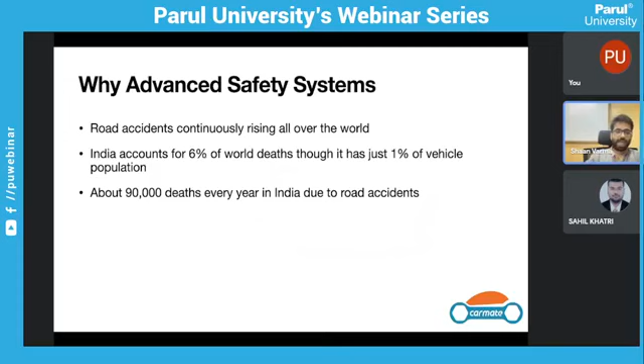So for that, there are two kinds of safety systems: one is active safety system and one is passive safety system. Now if we see the stages of accident, how we can do that: first is safe driving, wherein we follow all the safety protocols when we are driving, following each and everything in terms of safety. Second is accident avoidance, like we should avoid situations such as overspeeding and drunk driving. We should be driving in the proper lane at proper speed limits. Many things are there by which we can avoid the accident.

And then collision prediction. Now collision prediction is one thing, like humanly what we say, suppose we are driving and a car comes in front of us. For instance, one car is there, and if we have seen it, we try to brake the vehicle. But when we are not able to brake it, what happens? The accident is going to happen. So that is collision prediction from the driver's end. But now with active safety systems, there are many systems in place in which the vehicle detects that an accident is going to happen and takes corrective action to avoid the accident.

Similarly, these are three parts of active safety: safe driving, accident avoidance, and collision prediction. Now, if we talk about once the accident has happened, what do we need to do? Occupant protection, pedestrian protection, and occupant rescue. These three things come after the accident, which is called passive safety.

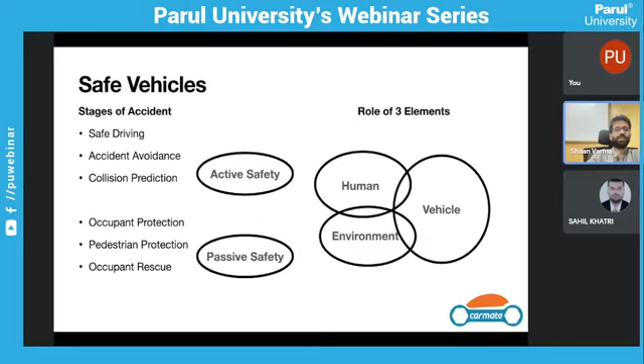Now, if we come to the definition: it is a scientific domain related to the study of design, construction, regulation of technology to minimize the occurrence and consequences of road traffic accidents. So these three factors combine into automobile safety.

Active safety systems help prevent accidents. They control the dynamics of the vehicle. Passive safety systems help mitigate the consequences of accidents. They protect occupants and pedestrians.

As an example, if you can see in the graph, active safety is hazard prevention. So hazard prevention includes hazard detection, hazard avoidance, and then hazard mitigation, so that the crash doesn't happen. For example, we are driving on a road, there is a car ahead of us, and the car suddenly brakes.

Now what we do is we try to maneuver or brake. If the distance is safe enough, we can brake the vehicle and avoid the collision. So the first part is hazard detection. Hazard detection is the first moment when we see that the car in front of us has braked. Now avoidance is either we brake the vehicle or we maneuver it to the other lane.

Now, if you are driving at excessively high speed and you brake the vehicle, it will lead to slippage of tires, which in turn will cause you to lose directional stability and you will collide in front of you. Now there is a system called anti-lock braking system, very well known, everybody might have heard about it. What it does is prevent your tire from locking. So if the tire is not locking, you will be able to easily steer the vehicle and avoid the collision. That is called hazard mitigation.

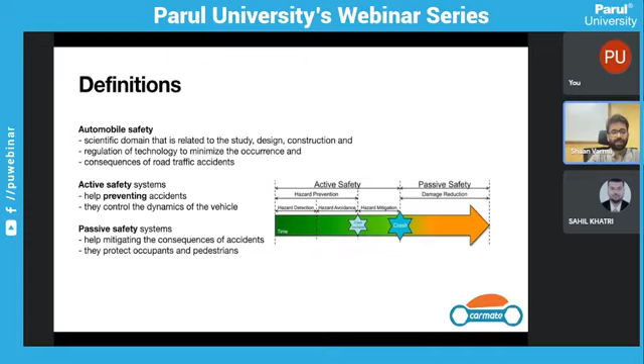Now we come to examples of active safety systems. One is the anti-lock braking system, which is the most common right now. We are also talking about traction control system and stability control system.

Anti-lock braking system, I have already explained. Traction control system is when you are driving at a speed of 80, 90, or 100, and you are taking a turn, your vehicle tires tend to slip, which leads to loss of control on your vehicle. In that case, you cannot do anything manually. So there is a gyro sensor inside your vehicle which will detect that the vehicle is going out of control and one of the wheels is slipping. It will tell the system that brake needs to be applied to regain control.

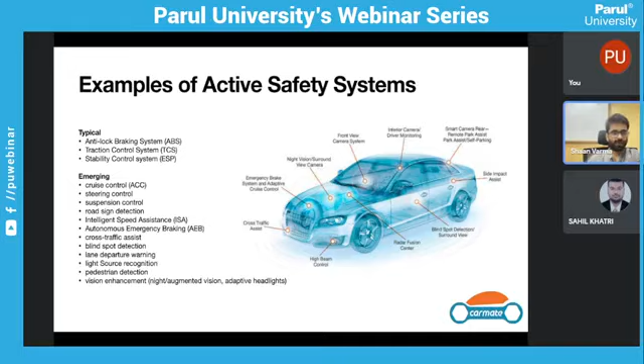We will have a look at a video of ABS and traction control system so you can understand it in a better way. I'll just play that video for you.

While the voice is coming for the video... No sir, voice is not there. Sir, just present your screen again as a tab. Just a minute, just a minute. Now again you present your screen, not entire screen, just a tab sir. Three options are there, I am not getting that option over here. Wait sir, just a minute. Sir, do one thing, just send me the link of that particular video in the chat box so I can share the tab. It will be done now. Just it's almost done, it will take a second.

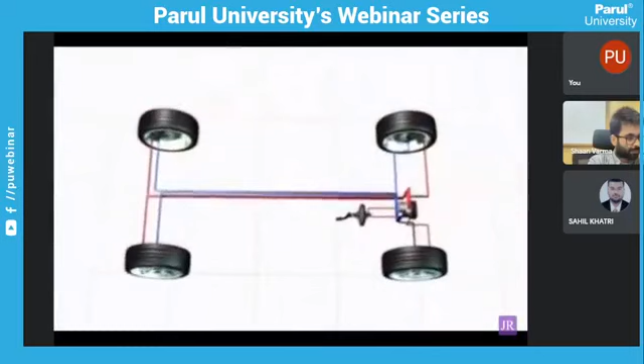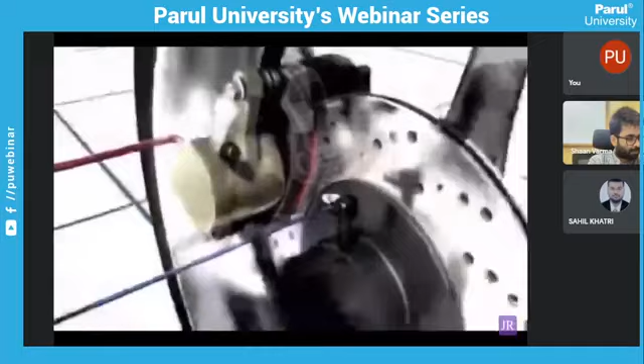ABS, the anti-lock braking system from Bosch, prevents locking of the wheels. ABS ensures that the vehicle remains steerable and stable while fully applying the brakes. The ABS control unit continuously monitors all wheels by means of wheel speed sensors. Should the system recognize that a wheel is locked, ABS immediately intervenes and systematically regulates braking pressure. ABS can regulate each individual wheel within milliseconds. With this electronic anti-lock braking system, a sort of electronic intermittent braking, ABS achieves stability and steerability with the shortest possible braking distance. Let's have a look at the ABS benefits in practice.

Full braking at 100 kilometers per hour. With ABS, the braking distance is significantly shorter and the vehicle remains stable.

Full braking in a curve. Without ABS, should the wheels lock while applying full brakes along a curve, the vehicle can no longer be steered and slips out of the curve. With ABS, you have the vehicle under control and you can steer systematically.

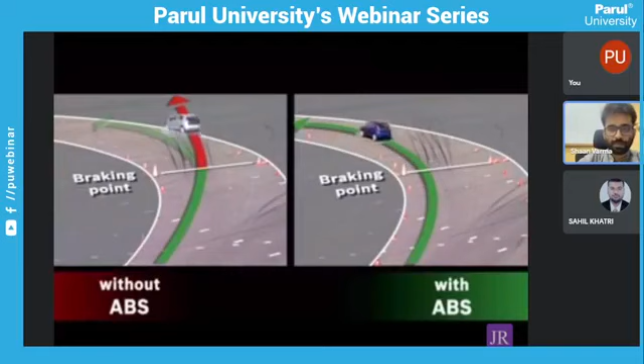Full braking and swerving. Should the braking distance not suffice, the driver must swerve to evade the obstacle. Without ABS, the vehicle cannot respond to the driver's steering attempts. With ABS, your vehicle remains steerable and stable. A collision is thus avoidable.

Full braking on different surfaces. Traction on lanes may vary due to volatile weather, dirt, and foliage. When fully applying brakes without ABS, the vehicle can quickly become unstable. With ABS, the vehicle remains stable even in this situation, with an optimal braking distance.

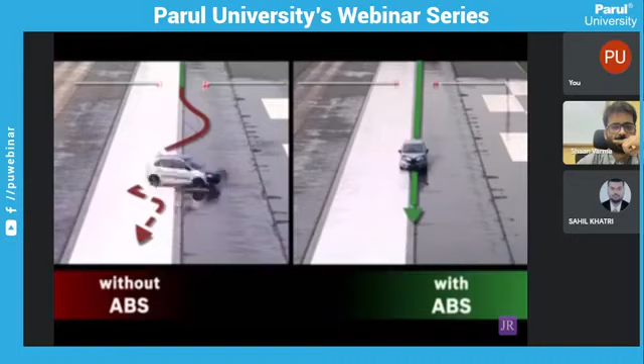In everyday life, these abilities of ABS.

So as you can see over here, we just saw how ABS can be fruitful and how it can prevent collision, and you can have control of your vehicle with that. Similarly, we will have a look at the video of electronic stability control and how it can prevent accidents.

As you drive, many forces act upon your vehicle. You probably feel some of them in everyday driving, like when you lean toward the side in a corner. When you turn the steering wheel, your car doesn't just move to one side, it actually rotates about a vertical axis. Under some conditions, the car might rotate too much or not enough, like when you swerve to avoid an obstacle, take a curve too fast, or encounter a slippery road.

This is why Mercedes-Benz invented ESP, the Electronic Stability Program. ESP's network of sensors, one of the most advanced in the industry, continually monitors how well the car is carrying out the driver's orders. ESP compares your steering inputs to the speed of each wheel and the car's rotation. Within milliseconds, ESP can sense if the car is not following your intended course.

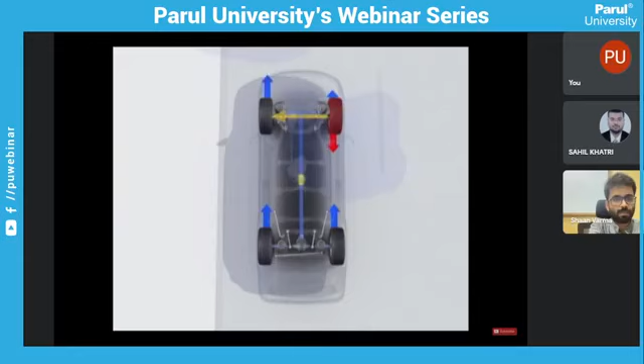Okay, so we have seen about anti-lock braking system, traction control system, and stability control system. Now these are the typical safety features what we had. Now with safety being one of the prime focuses of the automotive industry, with leading road accidents and deaths, there are many technologies which are emerging, like cruise control, which is again an older one. Then we have steering control, suspension control, road sign detection. I'll explain a bit about everything.

Cruise control is wherein you can set a particular speed limit and you can drive at that particular speed constantly without being engaged with the vehicle. Now, with things coming up in the future, we also have adaptive cruise control, wherein the cruise speed can be adjusted with the speed of the vehicle in front of us, so that collision is prevented. And also we do not need to worry about again and again re-engaging the cruise control.

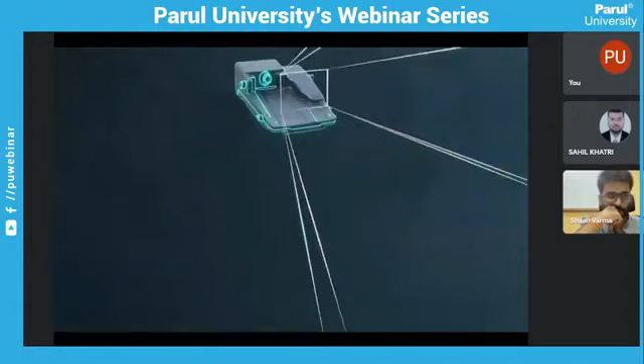The benefit of this feature is to help reduce driver fatigue and support safe driving, especially in traffic congestion or long highway trips. Lane Tracing Assist operates by making use of both the camera that is centered at the top of the windshield and the millimeter wave radar located at the front of the vehicle.

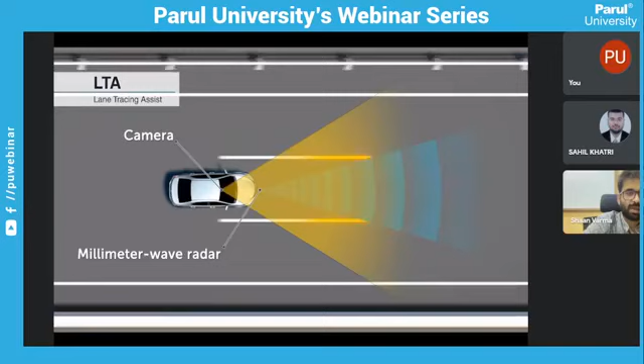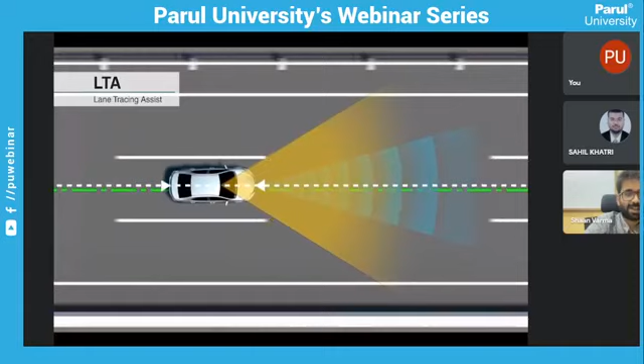These two pieces of equipment recognize white and yellow lane markings or the path of a preceding vehicle if lane markers are temporarily not available. By doing so, the vehicle can identify and actively track the center of the lane when dynamic radar cruise control is activated by providing steering assistance to the driver even on curved roads.

When in use, the Lane Tracing Assist feature can be identified by two new blue lines that are located outside of the pre-existing white lane markers shown on the multi-information display. If lane markers are not clearly visible, the system will also operate by tracking the path of the preceding vehicle ahead. This operation can be identified by three white dots appearing in the MID display instead of blue lines.

It is important to note that both the Lane Tracing Assist and Lane Departure Alert adjustments are incorporated together within the same MID menu labeled as LTA, but can be used separately. Within the LTA menu located in the MID display, both the lane centering and steering assist functions must be set to ON for the Lane Tracing Assist feature to be activated.

In order for the Lane Departure Alert with Steering Assist feature to be activated, only the Steering Assist function must be set to ON. When the Lane Departure Alert system activates Steering Assist, you will notice that the blue LTA lines will appear on either side of the vehicle where Steering Assist is being applied. If both lane centering and steering assist are turned off, the Lane Departure Alert feature will still provide audible and visual alerts if the system is enabled by the steering wheel controls.

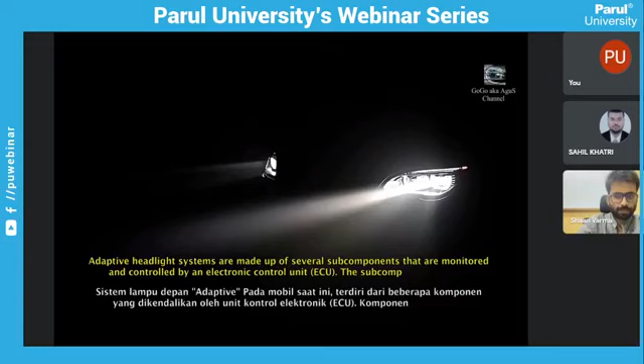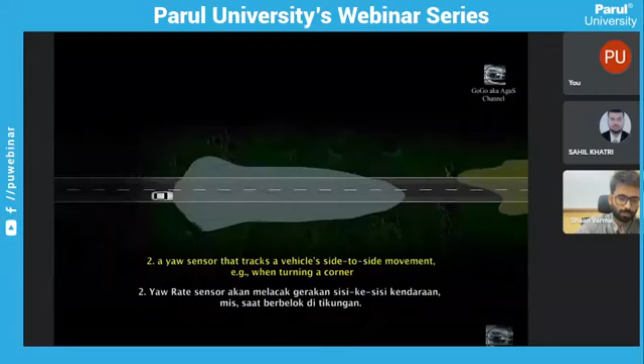Adaptive headlight systems are made up of several subcomponents that are monitored and controlled by an electronic control unit (ECU). The subcomponents include: wheel speed sensors that monitor the speed of rotation of each wheel; a yaw sensor that tracks a vehicle's side-to-side movement, e.g., when turning a corner; and a steering input sensor that monitors the angle of the steering wheel, plus small motors attached to each headlight.

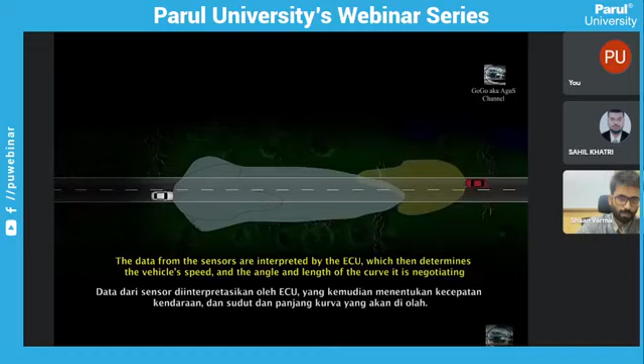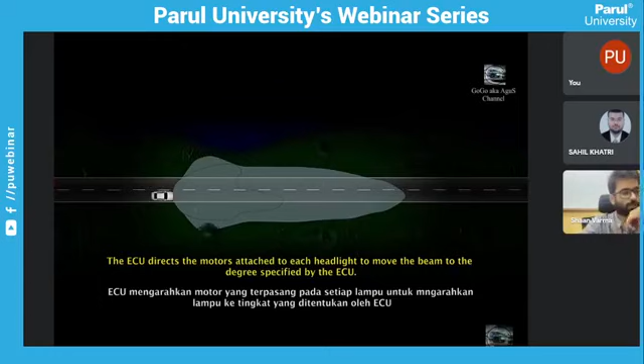The data from the sensors are interpreted by the ECU, which then determines the vehicle's speed and the angle and length of the curve it is negotiating. The ECU directs the motors attached to each headlight to move the beam to the degree specified. Most adaptive headlight systems can turn the headlights up to 15 degrees per side. Newer versions of the advanced headlight system have even larger ranges of motion.

Most adaptive headlight setups also include a self-leveling system. This system helps prevent headlights from pointing too far up or too far down when driving up or down hills. A self-leveling system includes a level sensor that sends information to the ECU about the vehicle's position, specifically whether it is tilted forward or backwards. The headlights are then moved up or down to correct for the vehicle's positioning.